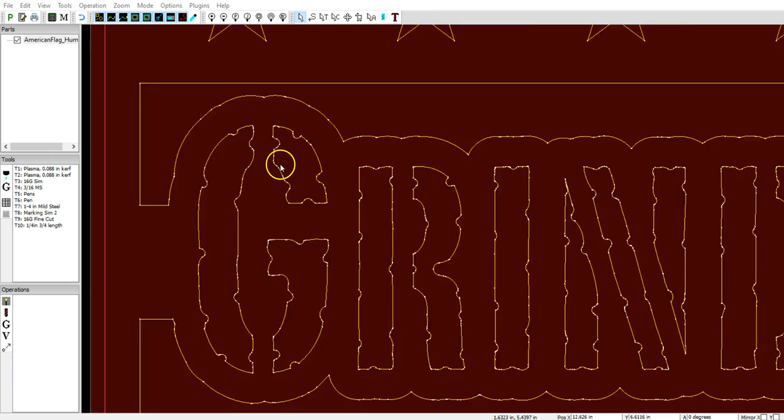So immediately we're struck with two different colors on the screen. If you don't see the colors, let's say you see it all in white, or you see it all in this unique gray, if you ever need to see the red versus yellow, go to your pointer tool, click off the screen, and you should be able to see the yellow and red. So yellow represents an inside shape, red represents an outside shape. And if we see a red inside of a yellow, that means that it's an inside of an inside shape.

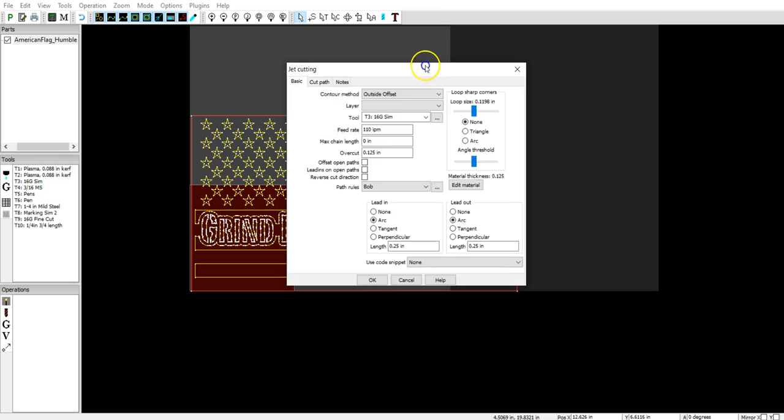Let's see how this impacts our drawing. Alright, so we have our red representing outside, yellow represents inside. This is important because SheetCam recognizes both the yellow and the red. We're going to go to Operation, Plasma Cut. We're going to select our layer, Layer 2. We're going to go to our tool. I'm going to use a 16 gauge simulator tool. We're going to set this to 249 inches a minute. We're going to have a 0.25 or a quarter inch lead in and lead out right here. We're just going through the basic steps of setting up the file.

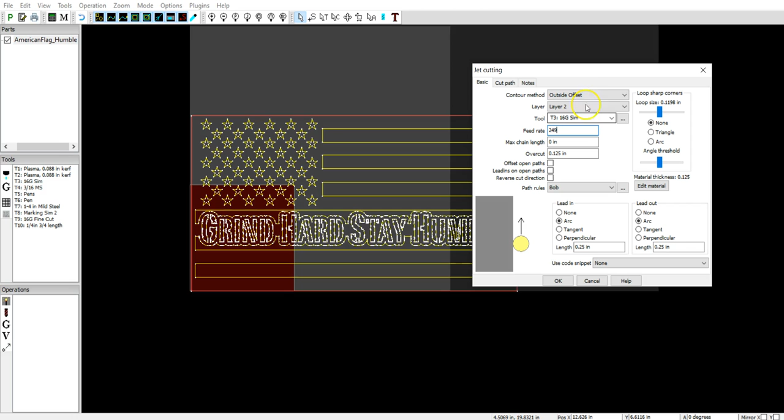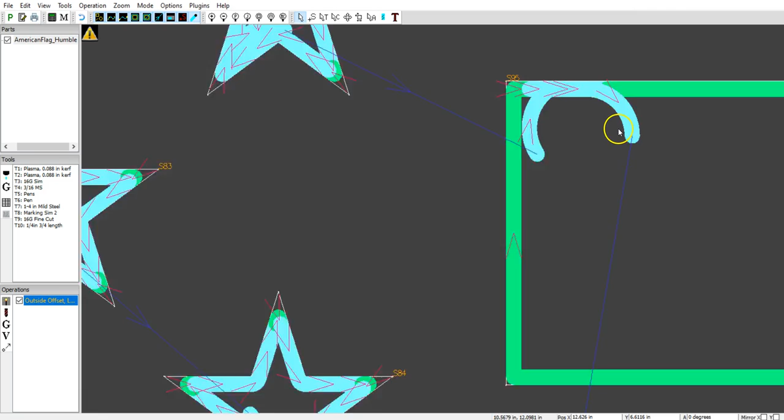But I have this set to outside offset. This is where we need to highlight this. Outside offset is listed there. We're going to hit OK. Boom. All right, let's take a look at this. On an outside offset, this is what you should be seeing. I'm going to hit this button. This is how your system will usually read the file. My offsets actually put my lead in and lead out to the middle of these stars. This is where you want to see those lead ins and lead outs, and that's because we did an outside offset.

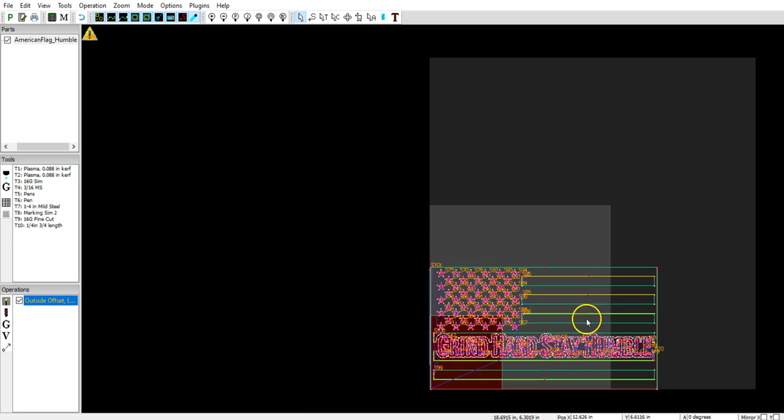So what an outside offset means is on this red outside shape. Let's move that to the center. If I were to put my operation on there, it's going to cut from the outside of the outside shapes. And these inside yellow shapes, it's going to cut from the inside of the yellow shapes. So technically, looking at this file based on the way it was designed, it's just a matter of importing the file, selecting outside offset, and then everything else falls in line. This is how it's going to look when it's cut. It's really exciting. I say we take it.

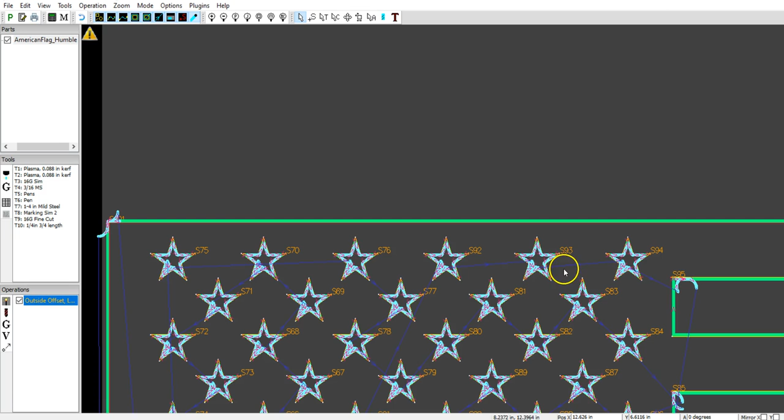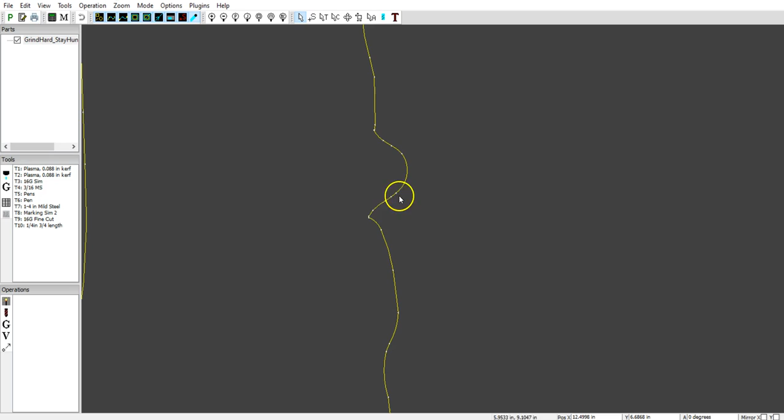Let's go ahead and move on to another file. Again, we take a look at this. I like what I'm seeing already. We have red on the outside, yellow on the inside. You see all these white dots? These white dots represent vectors. And you're likely to see more slag development along these grooved and unique shaped points just because we have so many individual vectors forming those points.

And the plasma cutter is going to speed up, slow down, speed up, slow down between every single one of these lines because it has to be able to make the proper turns and keep with the proper accelerations so that you get as consistent a cut as possible. But having so many vector points like these corners here, you're going to see a lot more slag development.

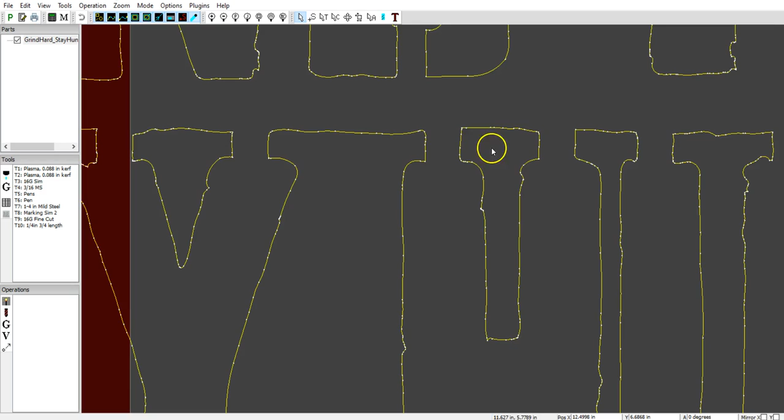But because this is also stylized to be this grunge look on the outside, this worn or weathered look is probably a better way to put it, you're going to need some of those vectors to be there just to emulate that curve and give you that rough edge. So I will leave that purely up to your artistic instinct, but the fewer the vectors, the cleaner it cuts.

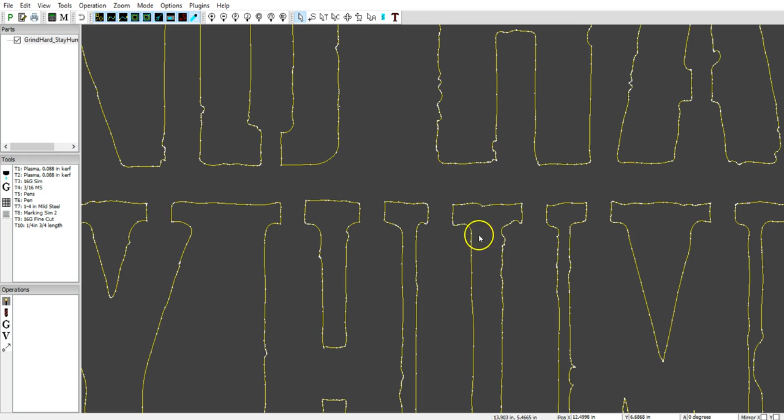So if you maybe want to reduce some of these tight points to, well, you have one here, and one here, as opposed to 1, 2, 3, 4, 5, 6, 7. It looks like there's 3 right there. So we can make some judgment calls artistically as well as for the plasma cutter vector count wise, because you may not need all these vectors here and you may want to come by and just clean them up.

Okay, so here we go. We have this sign. Again, we're going to follow the same format here. We go to Operation, Plasma Cut, Outside Offset, because it's going to cut the outside of the outside shapes and the inside of the inside shapes. That's what outside offset means. Everything else is staying the same here.

And if you look closely, again, it's cutting the inside of the inside shape here, because this Y is staying in the piece, so it's obviously going to cut around it. So it's coming from the inside of the inside shapes and the outside of the outside shapes. Awesome to see. Let's see what this is complaining about. Okay, so this is saying some features were too small to machine. There could be something wrong with the drawing.

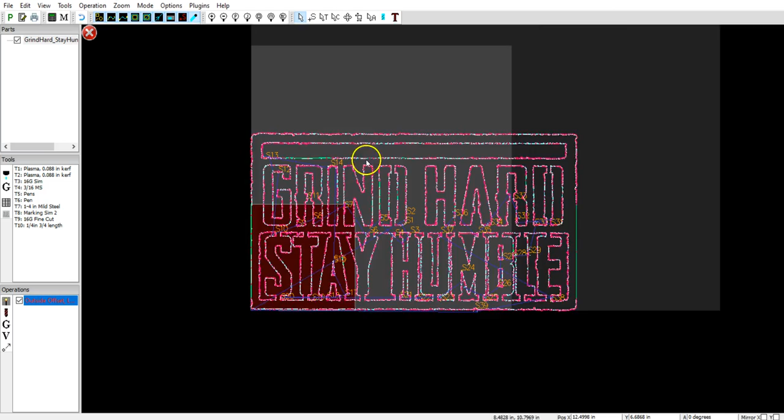So what it's likely complaining about is right here. This feature itself is also too small for the plasma cutter to come in and cut. You know what? That's sort of the nature of the biz here. We can't really do anything to change that unless you want to go through and actually redesign that part of the file. Entirely up to you. The plasma cutter is going to ignore it anyway. You can go to cut it out and it'll cut out just fine.

Okay, let's go and look at least one or two more here. All right, fantastic. Let's take a look at this next one. We have woke. And this is a really clean file. I like the quality of the file I'm seeing here. Red on the outside, yellow on the inside. Again, I can't complain. Well, what can I tell you here? We're going to go through the same process. It's going to be outside offset, and it'll cut out just fine. That's the beauty of having these files here. I can't complain. I'm trying to sit here finding something wrong, but I can't.

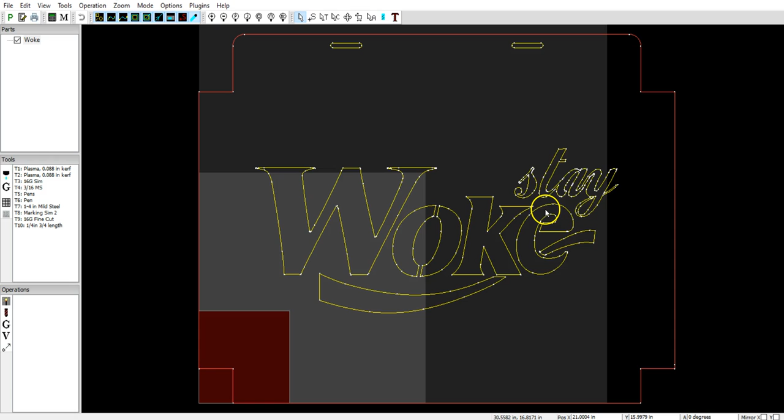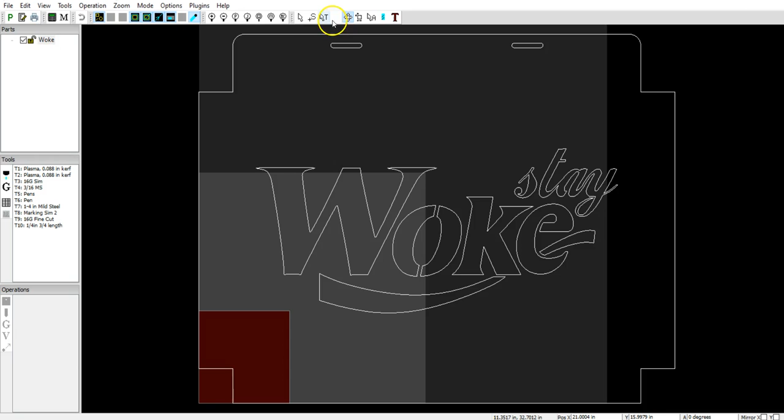The reason you'd find something wrong would be things like disconnected lines. So if this was a white outline as opposed to a red outline, we can find that, oh, okay, this is a line as opposed to a shape. So anything represented in white when it comes to lines is a line, not a shape. Now remember, it does look white in this screen, so make sure you go back to your pointer tool. Nesting tool, it's going to appear white. Pointing tool, as long as you click off the screen, this should appear red and yellow.

If it's still all white after going through these steps and clicking off the screen, then it's likely that these aren't shapes, they're lines. So keep that in mind, because that would impact if this was an outside line as opposed to a shape. That would mean that the next level of shape, or the only available shape, would be these letters, and these letters would be in red. So if we do outside offset, it'll cut from the outside of these letters, because this outside, if it was white, would be a line. And it's going to cut along the line and then recognize this as the outside shape, and give you all of those lead ins and lead outs on the outside.

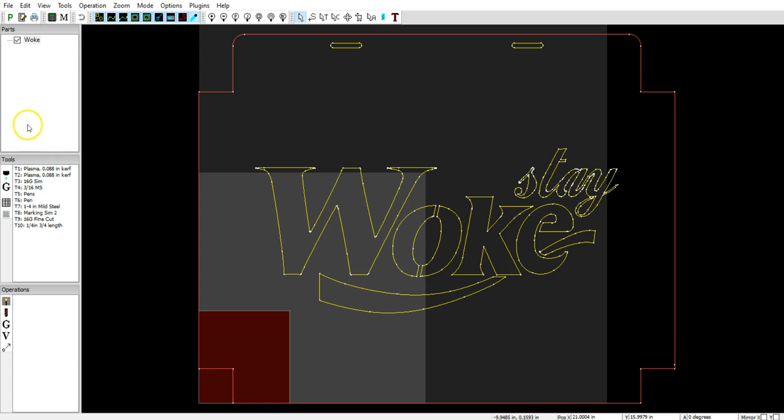But because, again, we're red on the outside, yellow on the inside, we can go ahead and go to Operation, Plasma Cutter, hit that same icon down here, and outside offset, there we go, boom, take a look at that. And it's going to cut out. So really not a whole lot to say to fix that one, because every file that I'm opening up so far seems very clean, has red on the outside, yellow on the inside. I'd say you've got this.